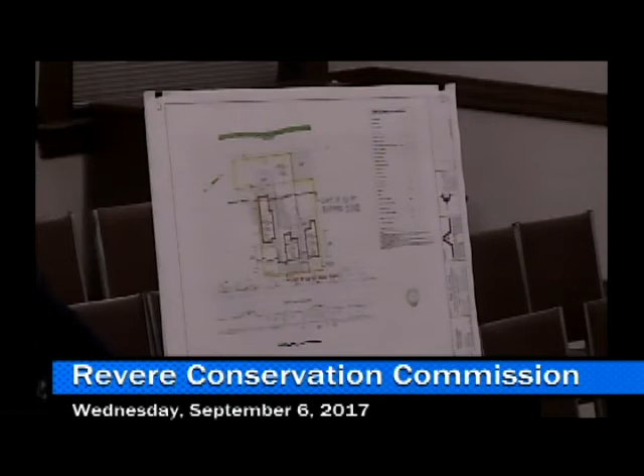The subject property is located at 459 to 463 Revere Beach Boulevard. If I flip this, this might put it in a little bit better context. The bathhouse down on the boulevard is located here. These are 4 properties located directly across the street from the bathhouse. 3 out of the 4 properties are developed with single-family dwellings, and there's a 4th lot at the rear, which is vacant. For the benefit of any abutters here, there is no proposed development scheme at this time. We're simply filing an existing conditions plan to discuss the resource areas that exist on site in an effort to get the tools we need to come up with a design.

Most likely, this design will be filed back as a notice of intent with this commission once we get the resource areas agreed upon by all parties. And it's likely going to be a multifamily condominium type project.

But nonetheless, the resource areas were delineated by Greg Hochmuth of Williams and Sparages. There's 3 major resource areas on this property. As you know, Revere Beach is identified by CZM and mapped as a barrier beach, so this whole area of the boulevard is a barrier beach. There is a bordering vegetated wetland located off-site to the rear of the property, delineated by a series of wetland flags shown on the plan, located by field survey.

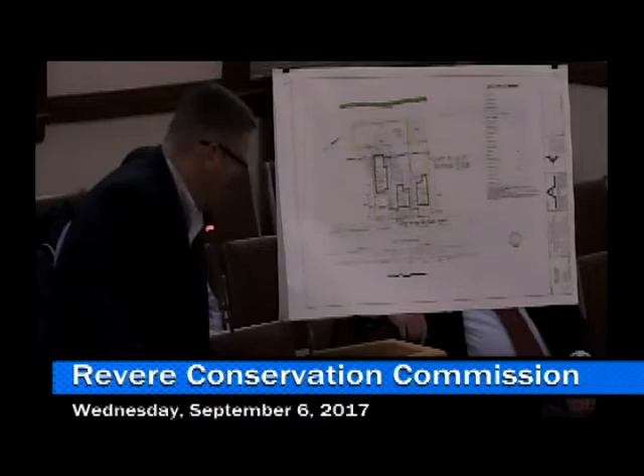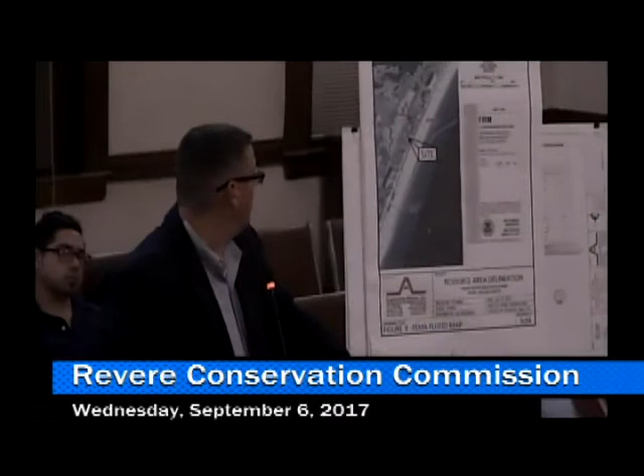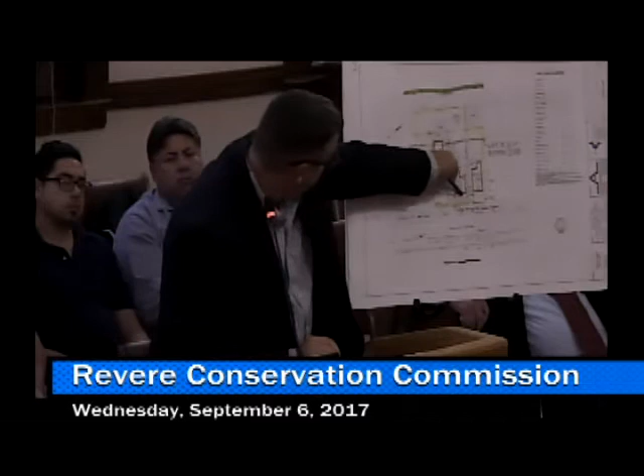As you know, this whole site was remapped back in March of 2016 by FEMA. It's a coastal floodplain, Zone AE, elevation 11, which under the Wetlands Protection Act regulations is identified as the resource area known as land subject to coastal storm flowage. That line I've highlighted in red right here is elevation 11. So it extends, the front side of the boulevard is actually outside of the floodplain, and that line back is located within the floodplain.

According to the survey, which was done on the NAVD 88 datum, the topography on site ranges from about elevation 12 up at the road down to about elevation 5.5 towards the rear of the property.

If I take each of the properties in order, the first parcel has a two-family dwelling on it, a bituminous concrete driveway extending to the rear, a retaining wall in the front, and a small maintained yard area in the rear. The second dwelling also has a retaining wall in front and a maintained yard area with a driveway on the side. The third dwelling has a paved driveway to the rear, a hard pan gravel area to the rear, and a little bit of maintained lawn in the front.

These lots are all fully developed. We did insert data into the ANRAD indicating that although this is a barrier beach, in our belief it does not contain any coastal dune resource areas because the land is completely consolidated. It's not able to move and erode and do the things that dunes need to do because it's locked in by a roadway, a sidewalk, a retaining wall, dwellings, bituminous driveways, and hard pan gravel areas.

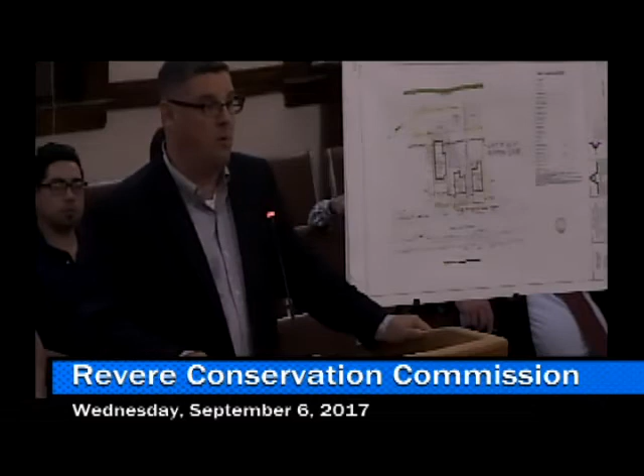As you might recall from previous filings, the sewer on the boulevard runs along the backs of the properties, not along the street. But that's only indicated as 5 feet. Correct, so that wouldn't be used as access to the property if it's developed. No, we would work with the entity that benefits from that easement to relocate the easement and the sewer line, to get it outside of the setbacks and outside of the development.

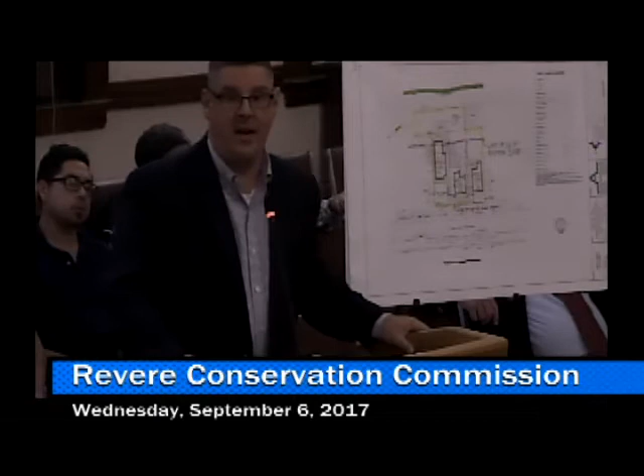And where would you have the availability of going through the property? So obviously the zoning has front yard setbacks, side yard setbacks, and rear yard setbacks. What we would do is relocate the sewer within those setbacks to get it outside of the zoning envelope, or outside the building footprint. And then where would the access be from the boulevard to the property?

I think we're confusing two things, let me clarify. Are you talking about the easement that's there not being for access? If that property is developed, how would individuals access the property from the boulevard? Oh, through a curb cut. We'd go to DCR and get a curb cut permit.

But that property is already owned by the 3 houses, correct? I think I'm missing something. So the owner is going to purchase all 3 houses, demolish them, and build a new development there. Oh, all right, I wasn't clear. Okay, thank you. But that would come in a subsequent filing.

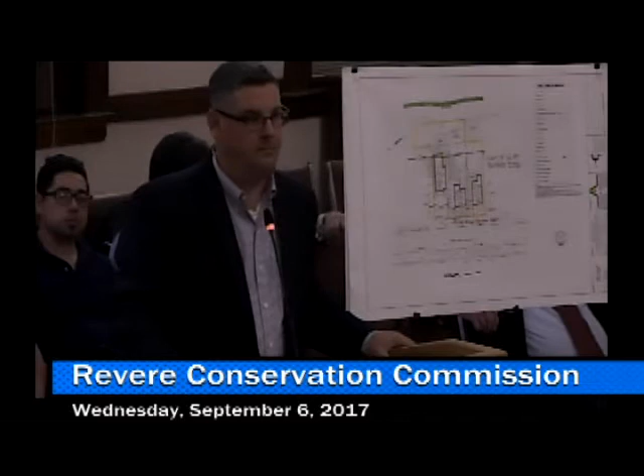Anybody else? Yeah, I have a question. Go ahead, Member Savoni. First of all, thanks for preparation of an ANRAD. We don't get too many here, so it's nice to see that before submittal of an NOI, especially in an area subject to so many resource areas.

But I did have a question about how the BVW was delineated. I know you mentioned something about it being consistent with other delineations in the area, but is it normal to see BVW preceding a salt marsh area, and why was it classified as BVW?

Because that's a more favorable determination for you when you develop the area versus salt marsh? No, the salt marsh is still there. Back years ago when the delineations were done, there wasn't a differentiation between the BVW and the salt marsh. Now there's a small fringe of BVW. I don't think there's harm with both boxes being checked because there is a salt marsh back there. We're not trying to hide the fact that there's a salt marsh back there. We would expect that both boxes would be checked on the ORAD should the commission choose to issue one.

Okay, thanks. Yes, both off-site, yeah.

Through the chair, go ahead, Member Lavalley. I'm not sure if you would have this information, but is there a height limit on property at that location? 120 feet. How many floors is that? 12? Thank you. Even though we haven't done any development schemes here, there's no propensity from the developer to build a high-rise here.

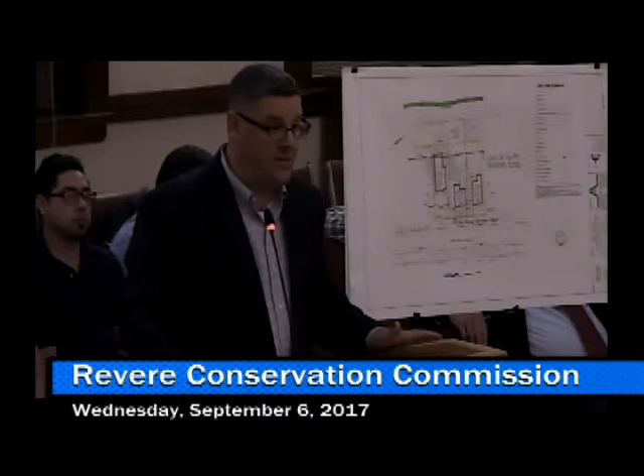Rick, can you explain the difference in construction regarding land subject to coastal storm flowage, bordering vegetated wetland, and salt marsh versus barrier beach? Sure. The land subject to coastal storm flowage doesn't have any performance standards at the moment, so it would be subject to FEMA regulations and local City of Revere regulations. The salt marsh, we're fortunate that even though there is a salt marsh off-site, it's not on-site, so you're not allowed to fill that, but we wouldn't be filling it because it's simply not on our property.

The barrier beach basically has to be significant, Chip, correct me if I'm wrong, in terms of storm damage prevention, and either fall under the performance standards of a coastal dune or a barrier beach, neither of which exist on this property.

That still doesn't explain the difference between construction, as I think you explained in your submission. I guess you hadn't understood, or you had verbally informed me about building on a different platform versus putting in a foundation.

The difference is foundation. If it were regulated as a coastal dune, imagine this site weren't developed and it were a sand dune - then you wouldn't be allowed to disturb any of the dune grass, which doesn't exist there. You wouldn't be allowed to disturb the dune, and construction wouldn't be allowed to prevent the dune from doing what dunes need to do, such as erode on one side and grow on another, and move and shape and change landform. So typically, when there's construction on dunes, it's all pile supported, up in the air, preventing impediment of the ground from being able to move and do the things it needs to do if it were an actual sand dune.

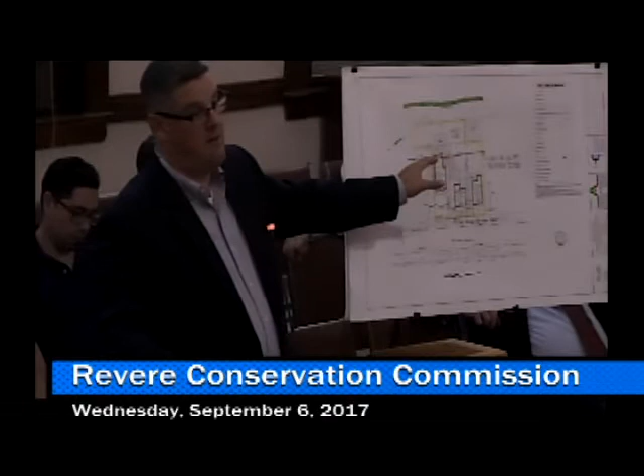Based on the physical features of the boulevard, and looking at other developments on the boulevard and Ocean Ave, from Ocean 360 to the beach house, they all lend themselves to drive-under parking in the rear with front entry at the street, because of the grade difference between the boulevard and the existing grades toward the rear. It sets itself up naturally to have a level of parking underneath the building at grade, perhaps a level at the boulevard elevation, and then stories of wood frame above that. The development next door to Seaview Towers, the beach house, is set up exactly that way: you drive down the back to enter the rear low-level parking, enter from the boulevard to the surface-level parking, and then there's several stories of wood frame above that.

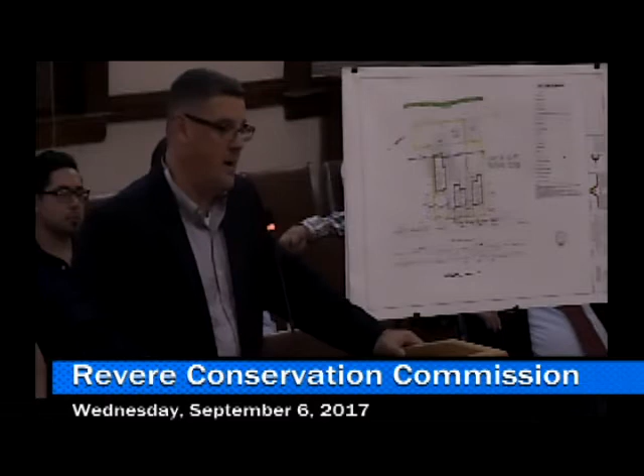But Seaview Towers doesn't have any parking underneath, it's simply all at grade? It's all at grade, but they have developed space down there, a boiler room, basement space, and storage space, which is completely different. That's under the high-rise category, and it seems as though when the zoning was written, perhaps it was meant to encourage high-rise construction with the 120-foot requirement and the FAR of 3. But we're not really at that point with this project, not really contemplating a high-rise.

Okay, anybody else on the commission? I just have one more question. This is a public hearing, please go ahead, Member Saboni.

Just out of curiosity, clearly what you're showing as the 100-foot buffer zone, is that for BVW or salt marsh? Either one, so the requirements are the same? Correct.

Okay, anybody else on the commission? Anybody in the audience would like to speak on this, it's a public hearing, in favor of or against? Come up to the microphone and introduce yourself, please.

Not particularly anything about the wetlands thing, but we actually live next door. What's your name and address, please? Fulgoni, 457 Revere Beach Boulevard. What's your last name? Fulgoni. Anyway, the houses are pretty much empty now.

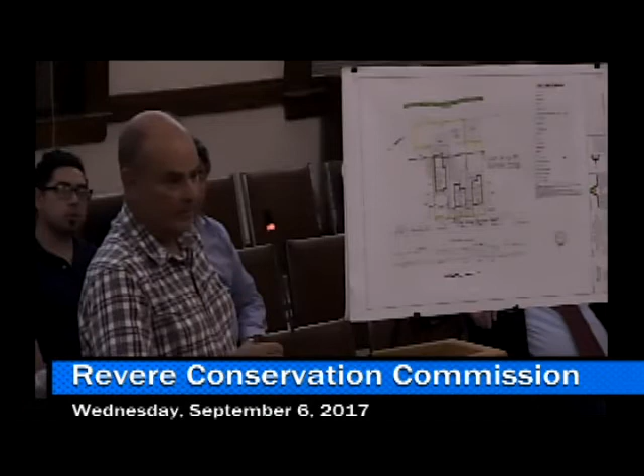I was just wondering if they're going to sit there empty, or are you going to knock them down pretty quickly? I don't want to see them sitting there collecting vagrants and that kind of thing, I was just wondering if that was the case.

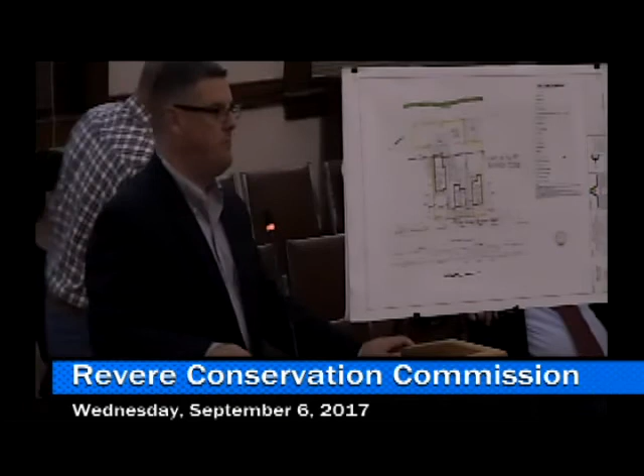I don't believe Rick's client is the owner yet, is he? Not yet, he has it under agreement. I guess the answer would be the applicant's intent is to get through the permit process, which is likely to take several months, and as soon as the permit process ends and he receives his permit, close on the property, immediately demolish the buildings and begin construction. But for the abutters who are concerned, anyone who develops that property, if it's empty now, is going to have to come in and secure the same permit.

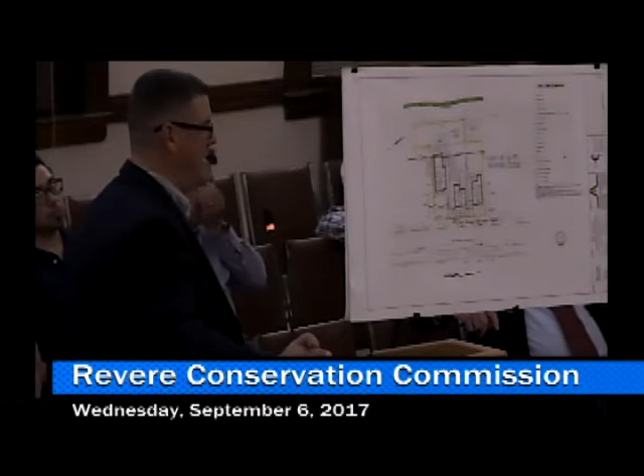That question is probably more appropriate when we come back and file an actual notice of intent for the development. At that point we'll have the actual footprint of the development and the contents fully figured out, which will give us a roadmap to exactly what our permits are, and we'd be able to give you a much better timeline as to when things would happen and in what sequence.

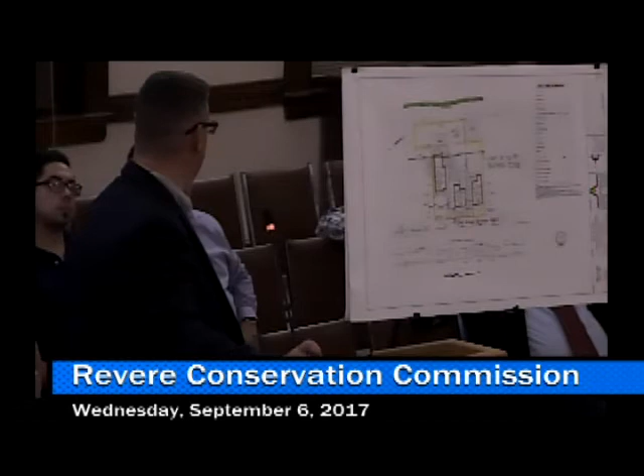What was the timeline for that? That could stay vacant for a while. So the timeline is, we have to get through this process, and once it ends and everyone's in agreement, we then have the tools to go to the drawing board and design a project, which is probably going to take 3 to 4 weeks to actually design, prepare a notice of intent, prepare stormwater calculations and grading designs, and understand what the footprint's going to be. No, that won't be months, because there's already been some conceptual work done, so we're probably about a month away from filing a notice of intent, I would say.

Unfortunately, my client right now doesn't own the properties, I agree. But three vacant houses is a concern for anyone that lives in that neighborhood. Yeah, I didn't realize they were vacant at this point.

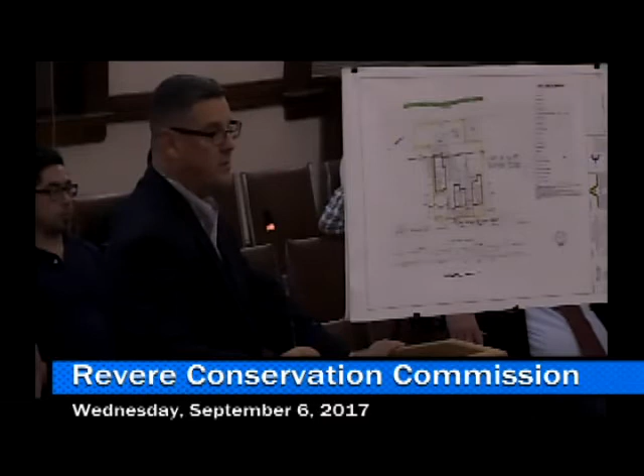Mr. Chairman, I'd appreciate if you bring the concerns of the abutters back to your client and let him bring it up to the current owner. The intent here is that it isn't just your best interest, it's your client's best interest to work with the abutters. Absolutely.

Mr. Chairman, if I may. Mr. Raponi, I hear you're going to pay us another visit within a couple of months? No, hopefully, I don't think we'd be able to make the agenda for the next meeting, but we'll certainly file by the next meeting an actual design proposal for this property.

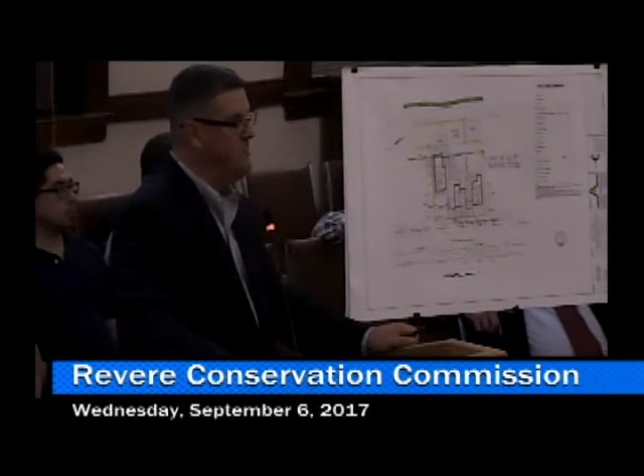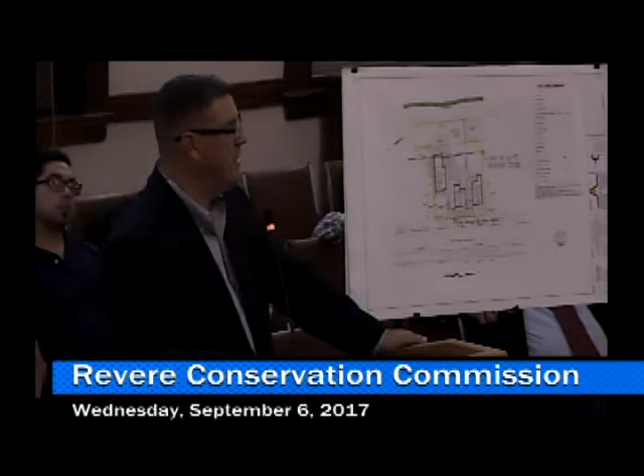Well, that was my next question. I don't want to sound redundant, but what do you expect to have before us, what will you be presenting to us on your next visit here? I'd like to know what's in store, what are your plans from now until our next meeting, and what we can expect. You can expect to see a multifamily condominium development, low-rise. That's about it? That's about it.

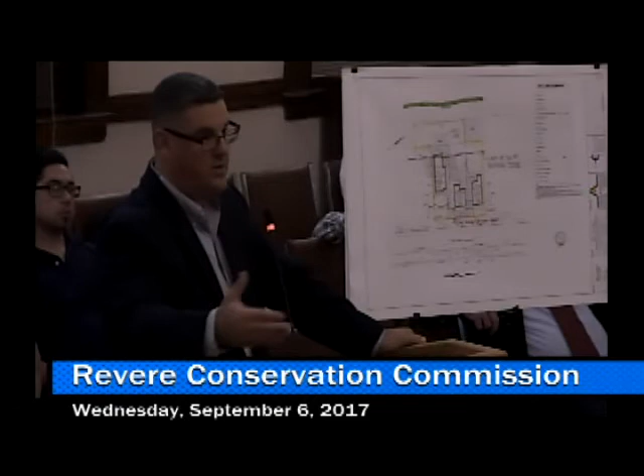Thank you. Well, you're not going to be able to make the next meeting. Correct. Do you think you'd be able to start a concurrent process with the other city agencies? Absolutely. We would go back, meet with the site plan review board probably one time. I expect, unless the DEP throws a wrench into the works, that we would have a filing to you at least by your next meeting. Not to be on the agenda, but filed by the next meeting. Okay.

Anything else? Anybody else like to speak on this? What's the wish of the commission on this? I've prepared an order of resource area delineation for land subject to coastal storm flowage and bordering vegetated wetlands.

So I'll entertain a motion to close the public hearing. I'll make a motion. To close the public hearing and issue the ORAD. Yes. Do I have a second? I'll second it.

Who spoke first? Nick? All those in favor signify by saying aye. Aye. Any opposed? Voted in the affirmative. Thank you very much for your time.

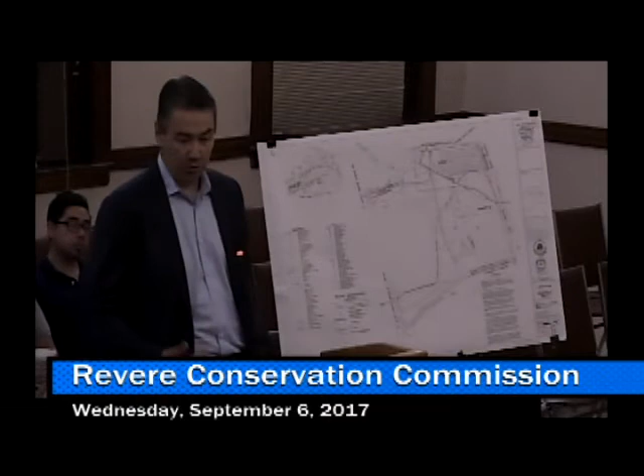I'm actually joined by Liz Clark of Beals and Thomas, she'll go through most of the details. One thing I can tell you is that it is definitely our goal to incorporate the wetland resources into the open space network that we will develop in the future as part of the redevelopment. But again, we are very early days, so the main goal was just to get on the same page with you to make sure we have the same understanding of where the wetlands are. Not much has changed since they've been mapped before, but we still want to be before you and start this process. So I'll turn it over to Liz as she goes through more details. Thank you.

Hi, I'm Liz Clark from Beals and Thomas. I'm a registered professional engineer, and we are the civil engineers and wetland scientists for the project.

Sales Creek traverses the site, starting up near Winthrop Ave. It comes out underneath the culvert and daylights in the northern portion of the site. It then travels via culvert underneath Tomasello Road, opening back up just north of the track, and then going again under culverts into the infield of the track, and then leaving the site via culverts.

When we mapped our wetlands, we did 5 different series: A, B, C, D, and H. The A series is the northern section of Sales Creek. In this area, we found only bank. This was delineated based off of break in slope. We looked at other indicating factors such as vegetation changes and soil mottling, and there was no bordering vegetated wetland vegetation surrounding this area. Our bank delineation does match the mean annual high water line.

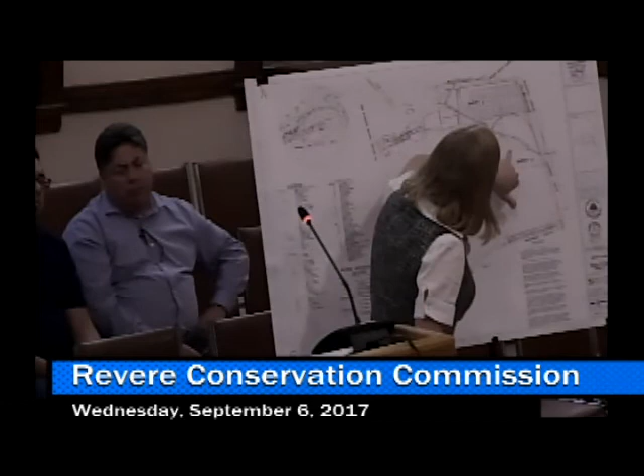Are there any questions on the delineation or the wetlands? I have a question, Member Saboni. And thank you for the detailed ANRAD.

Let me start by saying, whatever is going in this area, I think the developer came up—introduced the presentation by saying there are some really nice resource areas within the project vicinities, so I would agree with that, and whatever the proposed plans are for this area should incorporate significant green space and sustainability, and that's what we'd be looking for.

Bring the mic a little closer to your mouth here. I'm sorry, is that better? That's much better.

So how do you explain the lack of BVW with the exception of the infield area? To clarify, our wetland scientist is at the Boston Conservation hearing right now, and she can definitely provide more detail on that. My understanding is that there was neither hydric soils present once you got past the bank, nor was there any vegetation. There's a lot of Phragmites on the site, but there wasn't anything substantial around the A, B, C, and H series.